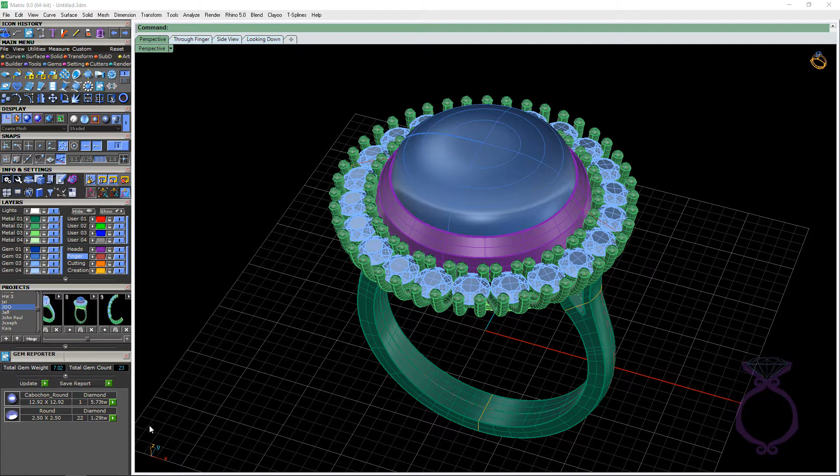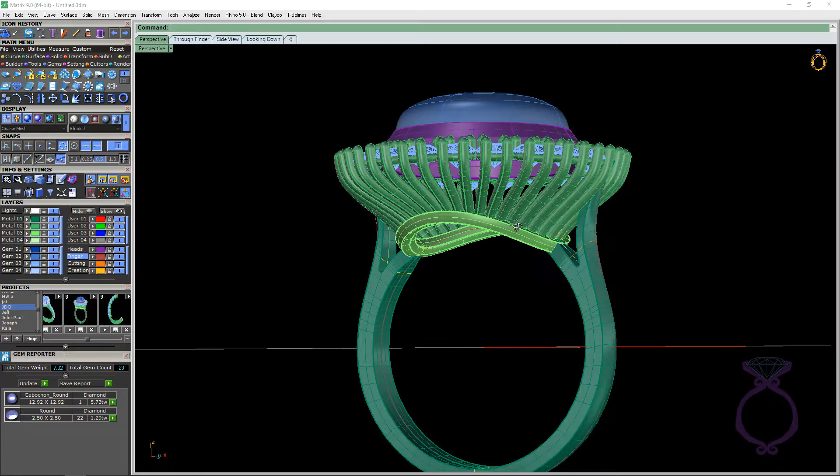You'll notice there's a cabochon here, almost a 13 millimeter by 13 millimeter cab bezel set, and then we've got 22 2.5 millimeter round gemstones set along the edge. So this is why you buy Matrix, or another reason why you buy Matrix—you can easily achieve this look. Some people will want to do this all by hand, but if you don't know a highly skilled jeweler who can do this, then this builder is awesome.

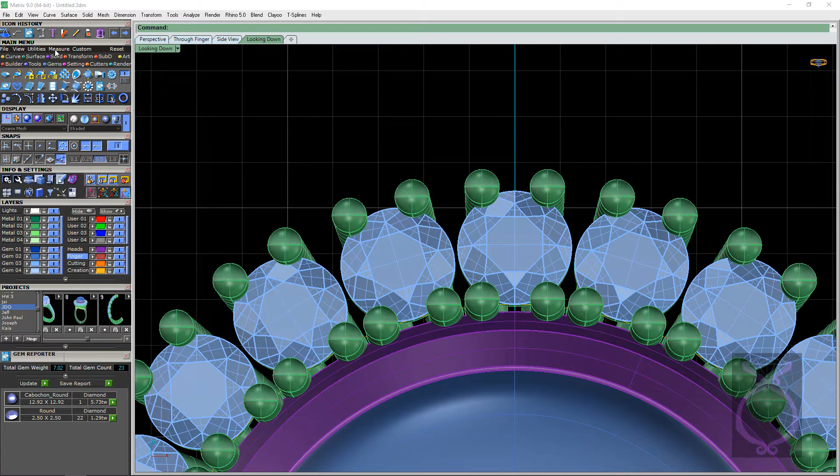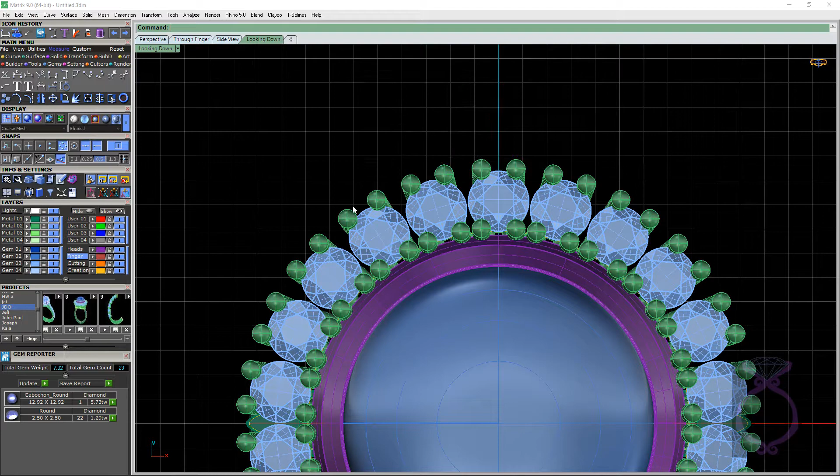Back to measurements, let's go to the looking down viewport. I'll just change my shade to shaded. There we go. If we go to measure, horizontal dimension, I have project turned on, so we're about 0.75 for these outside prongs or claws, and I like that thickness. Some people don't want it that heavy, but these guys are on the outside—they're going to get more wear and tear than the ones on the inside. I believe I made these inside ones finer... nope, I made them the same.

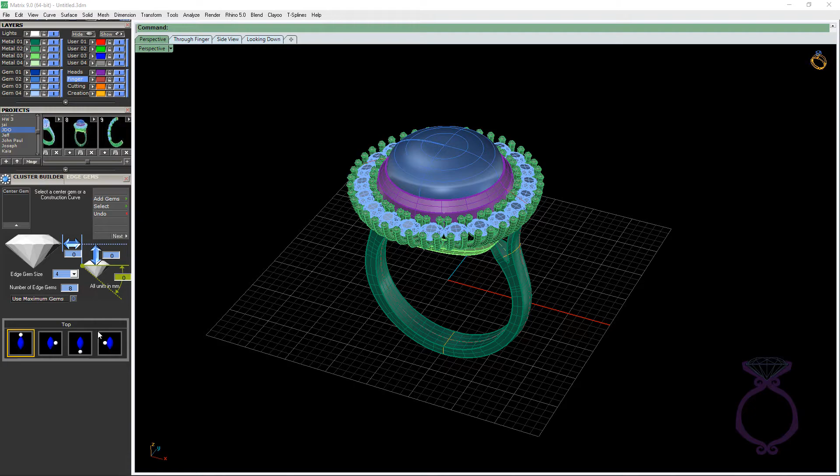But within the builder, you can adjust having these ones thinner, these ones thicker, and there are different arrangements for the prongs. So if we go into gems, here is Cluster Builder, and when I click on it—again, I go into detail with this in my intermediate class on how to build this ring, but here's a brief overview of this builder. Now you're going to put your center gemstone in the box.

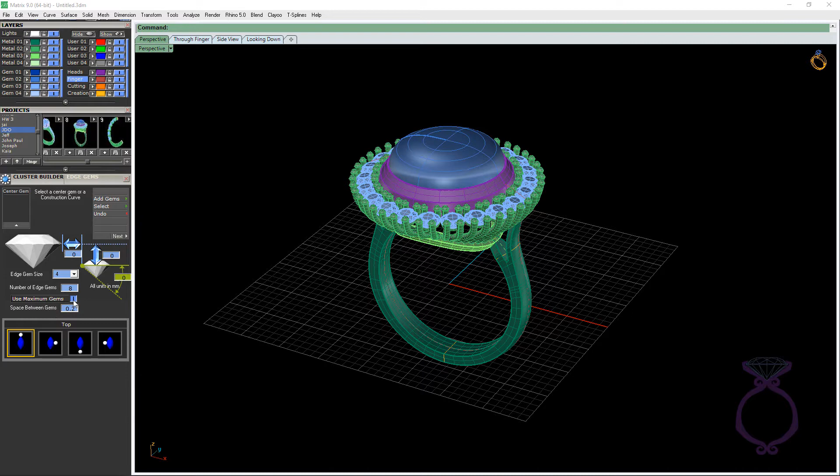I would then make a setting for your center gemstone, so you'll know how far this row of gemstones should be away from the girdle and how far down, and you can also angle it. You can choose your gem size in millimeters and how many gems you want, or you can let the computer choose how many gems it needs with a spacing in between the stones. These down here are just helping you place the stones in the correct location.

If we go to next, this talks about your under bezels and what profile shape. This is a percentage—I left this at 50%, but if you want them a little thicker, you can change this percentage. This is the distance from the girdle. Then you click on next.

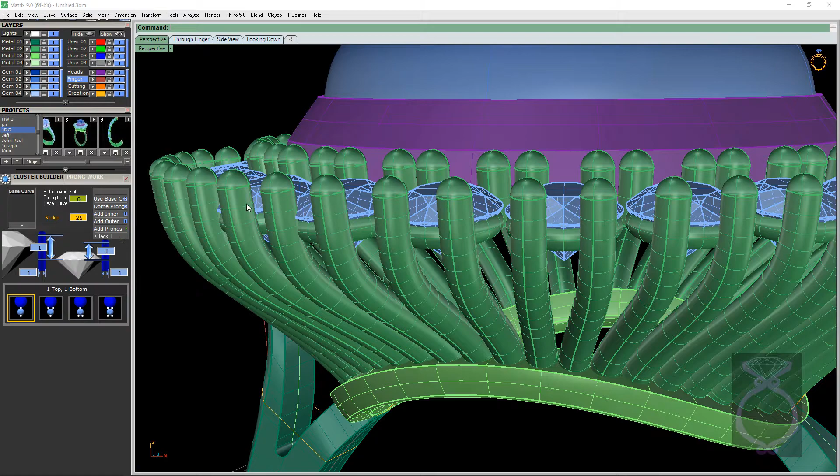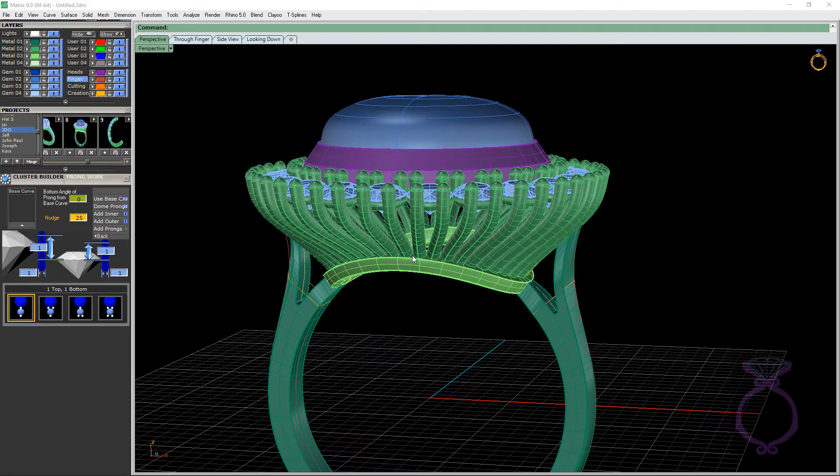And then when you first drop your gemstone—if we go back—when you first drop your center gemstone, it does create a curve, the outline of your center gemstone. This is what it's talking about with the base curve. You can drop it in there and then lower it down to whatever height you want, and that's where the prongs are going to build from the top down to the bottom, based on this base curve.

So it comes in flat. I bent it using curve from two views, so I was able to get sort of the saddle look here where it's bent around the ring rail. And then here you can determine the height of your prongs, the width of your prongs on the inside, and the same thing with the outside, so you can make these guys a little heavier.

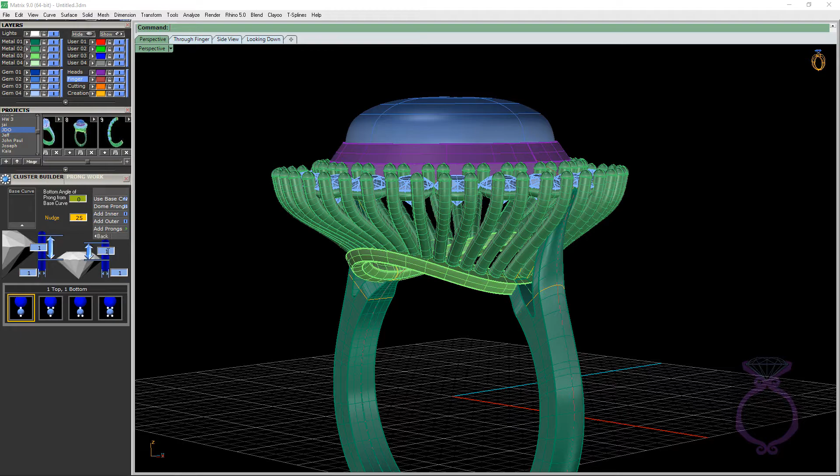You'll notice the arrangement I chose was this one here, but you could also have the single, or the double in the middle, single on the outside, single on the inside, double on the outside, and then two on the inside, two on the outside.

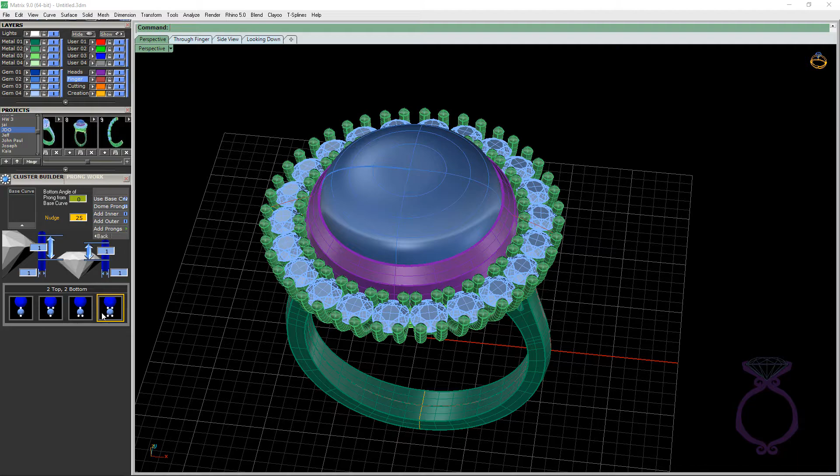Sometimes you don't like where these arrangements are. Most of the time I'm okay with what's going on the outside, but you may not like the arrangement here. One thing is that these are not grouped together, so you could move a couple of these together the way you want, delete the rest of them, polar array to get the look that you want or the distance that you want.

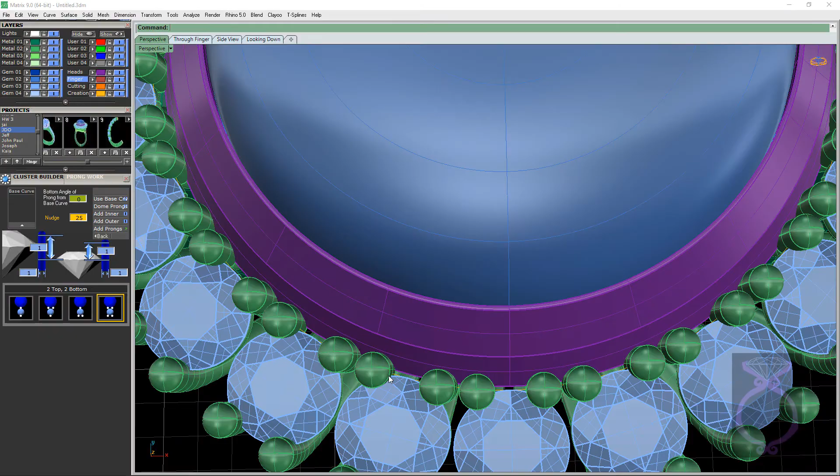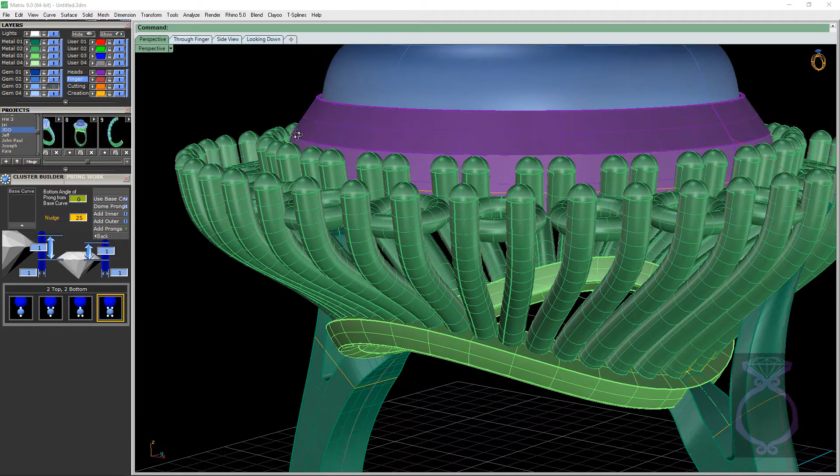Another thing to keep in mind, this is a bezel. If we look at this bezel, notice - let's turn off these colors here. Okay, so I made the bezel intentionally like this so that when the setter goes to set this gemstone, this is beveled. So again, they're not going to have to file away too much, and then they can just push or burnish over that metal to hold the gemstones.

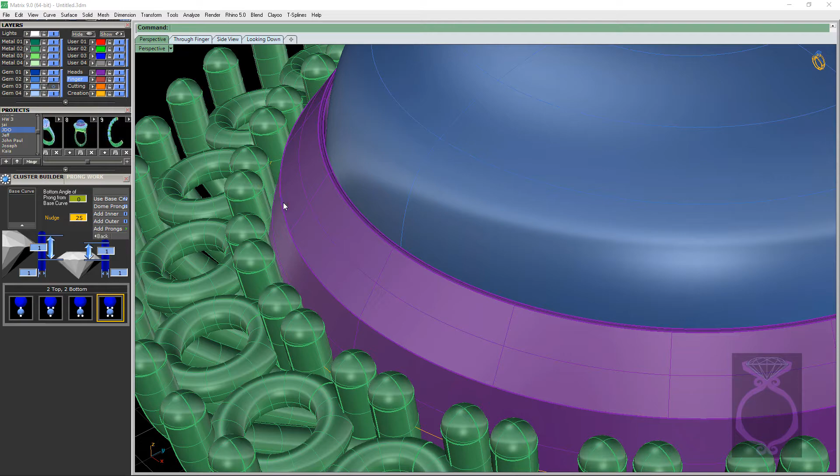But again, I wanted this beveled like this so that when I print it and cast it, these prongs are not connected to the wall here, so that the setter can easily push these over. So you got to keep in mind here to make it easy.

Sometimes the setter doesn't even touch these. You could lower these down and then pre-notch in here so that this is the only claws that actually get worked on. These are just standing still with a little notch on them so that the stone can just tuck in there and you're just pushing down here.

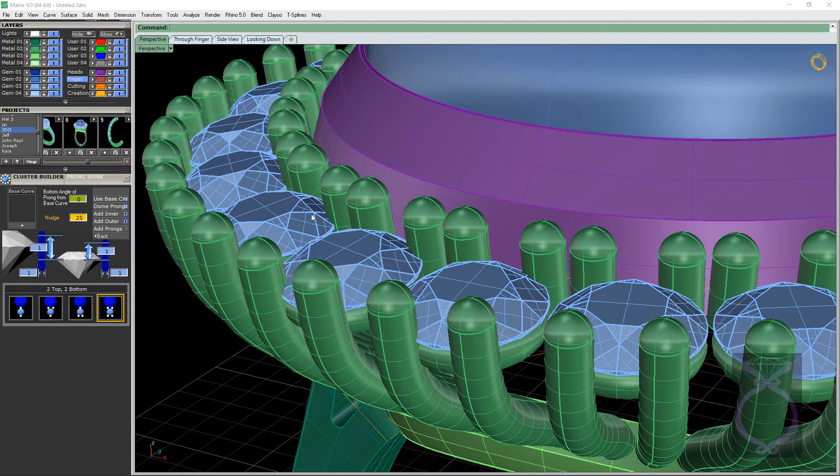So that's another option. So this is a short video - I just wanted to go through this briefly to show you how great this builder is. And I know if you've used it and it ended up being a train wreck, I'm sorry. But I have used it many, many times and been able to build this type of setting for my clients very quickly.

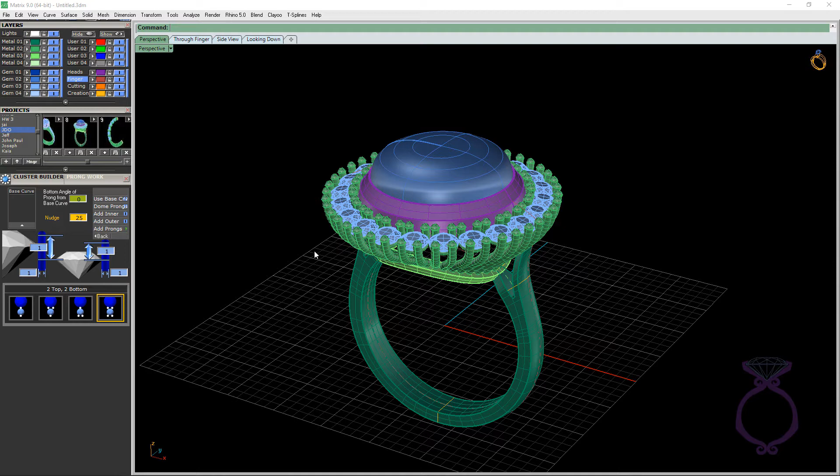You can also do a double row as well. So you just have to run it again and space out from here to the outside and then just run it again. Anyways, that's a couple little tricks on Cluster Builder.

If you've got to build one of these, this is the greatest tool. And I'm not a fan of clusters - I don't like them at all. I sold way too many of these in the 70s at my dad's jewelry store.

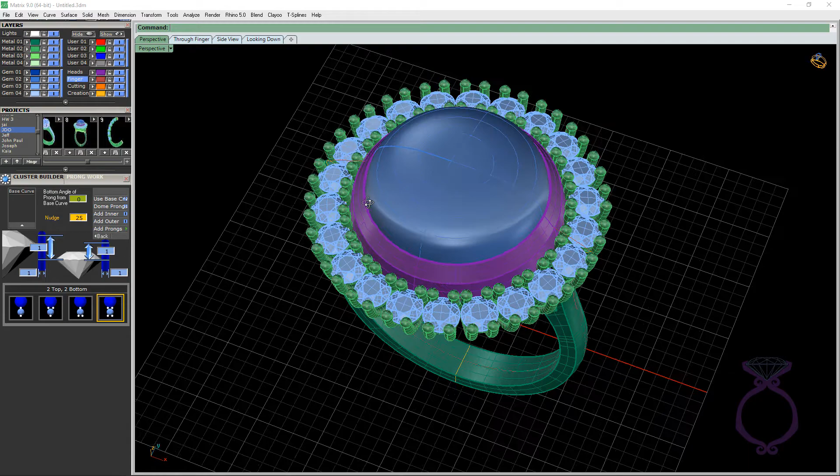So just to recap, you're going to just make sure that the center gemstone can be set properly with the bezel or the head that you design, with proper heights and proper thicknesses. The cluster itself, just make sure that these inside prongs are going to be about 0.5 to 1 millimeter in diameter. The height, these ones are 1 millimeter, but you may want them slightly lower and pre-notch them for your setter so that they can easily slide them in and push it over.

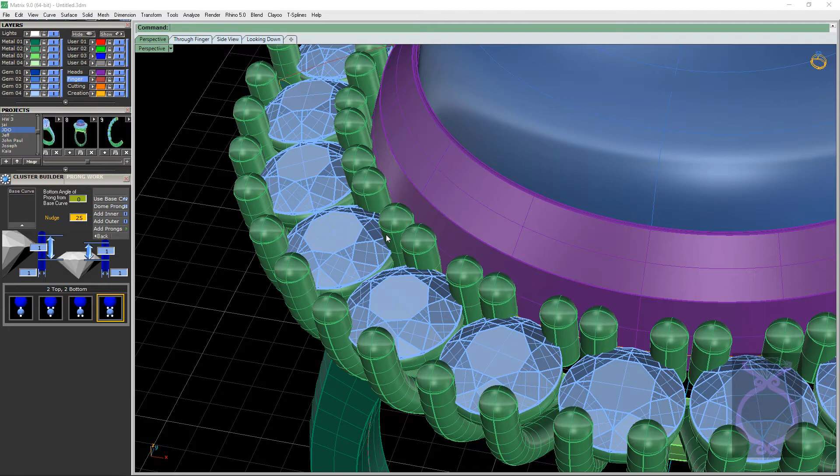You might think about making the outside prongs a little heavier because, again, they're the ones that are going to get the most amount of wear. And the other thing too is the height.

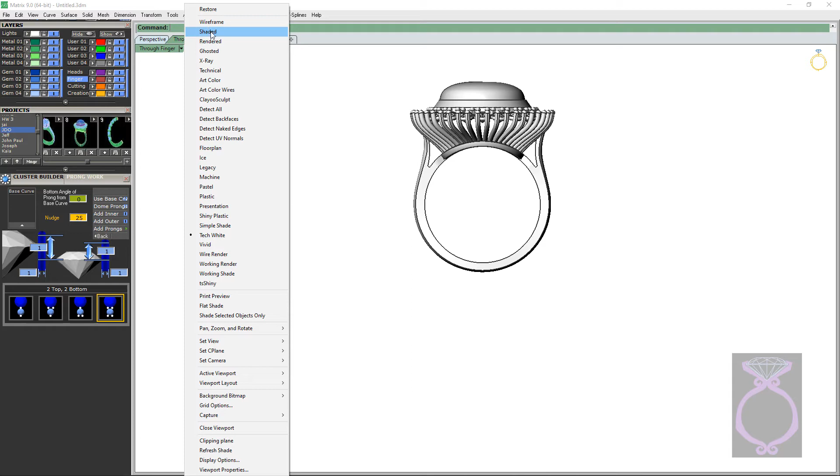Let's talk about this. If we go in the through finger viewport and let's just go into shaded. Now the height can be determined on what kind of gemstones you have. You might have a color stone with a very deep belly, and that's going to dictate on how high this is. But also you kind of want a nice look here.

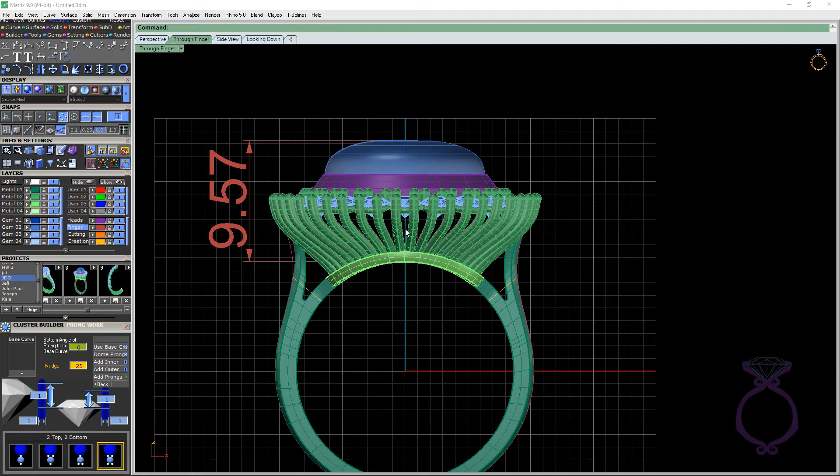So what is my height? If we go to measure, and let's just go with the vertical - okay, so that's almost 10 millimeters high. That's quite high for a ring, but again, this is quite a large stone and you kind of want a spectacular look. So this looks very, very nice.

And again, you can mess around with the bottom angle of prong to get the look that you want. I went in for sort of more of this swoopy look, but if you want more of a basket style, that's when you start messing around with this number here.